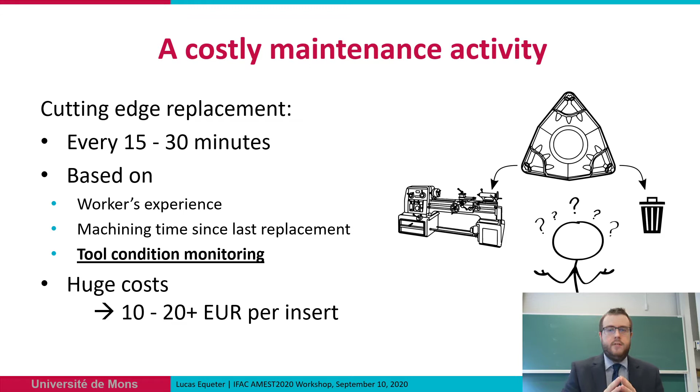In industrial practice, the replacement is based on several possible factors: the worker's experience based on machining noise or personal assessment of the machined surface quality, the machining time since last replacement, and finally the more modern option, tool condition monitoring. Each of these options corresponds to a type of maintenance. Obviously, the first case is highly dependent on subjectivity, and it is unclear how one should qualify this option.

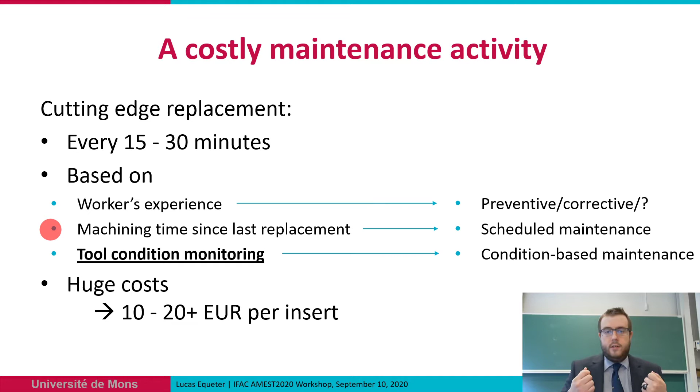Then we have scheduled maintenance or condition-based maintenance. That is the current industrial practice, so let's have a look at the standard guidelines.

In turning, for example, ISO 3685 defines conditions for tool life testing. These conditions are based on the flank wear of the tool. When the average measurement of the flank wear in zone B, denoted VB index B, reaches 0.3 millimeters, the tool is considered to have reached its end of life. The second condition is met when the maximum measurement of the flank wear reaches 0.6 millimeters, and the end of life is decided upon whichever comes first.

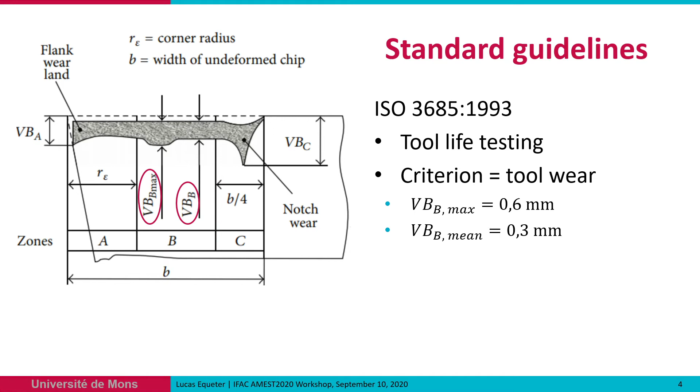Now, in comparison with industrial practice, it may be linked to two of the options. The scheduled maintenance option is directly derived from the standardized option. On the other hand, in the framework of condition monitoring, one may try to identify, through the use of sensors, the moment when this criterion is met.

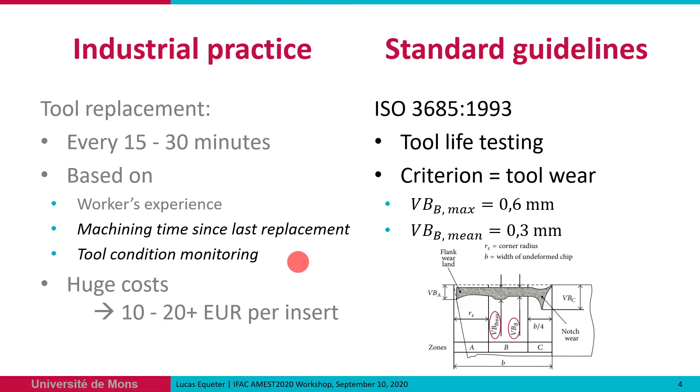However, the limit of 0.3 millimeters is arbitrary and does not correspond to any industrial optimum, hence the search for a remaining useful life estimate which focuses on an industrial optimum.

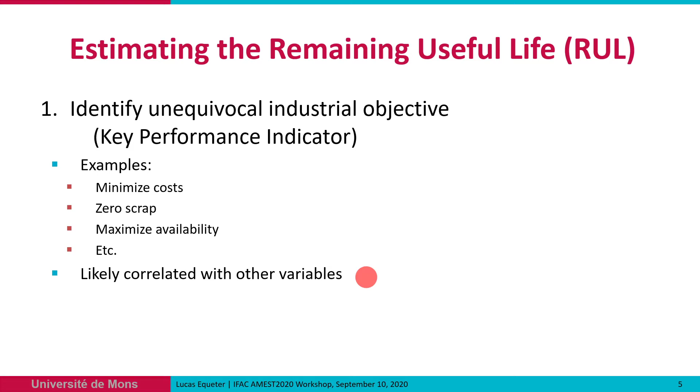With this respect, one should establish clear industrial objectives, among which the foremost criterion is likely cost-related, but it is likely correlated with other, more physical criteria, such as tool wear. Once the KPIs are identified, then statistical methods allow estimation of a RUL with respect to the industrial objectives.

To sum up, what do we know so far? Well, we have our process data: the duration of machining cycles, the number of machined workpieces, the costs, etc. We also know what we would like to optimize, be it the cost or the scrap rate, for example. In turn, we would like to be able to use a maintenance policy that best satisfies these demands.

So, for cutting tools, what do we need to invent to get from one end to the other? First off, let's acknowledge our maintenance optimization criteria. What do I want to optimize? Most likely the answer will be the cost or the profits.

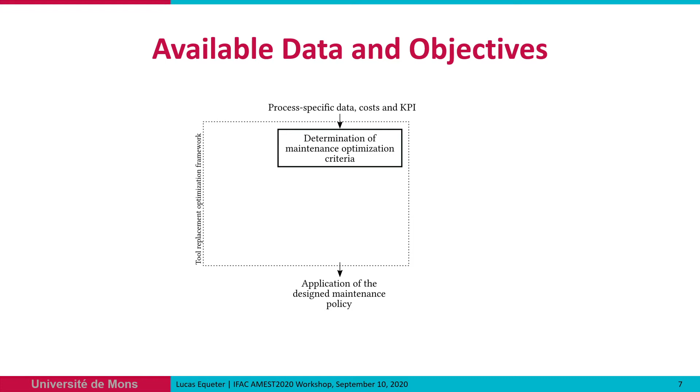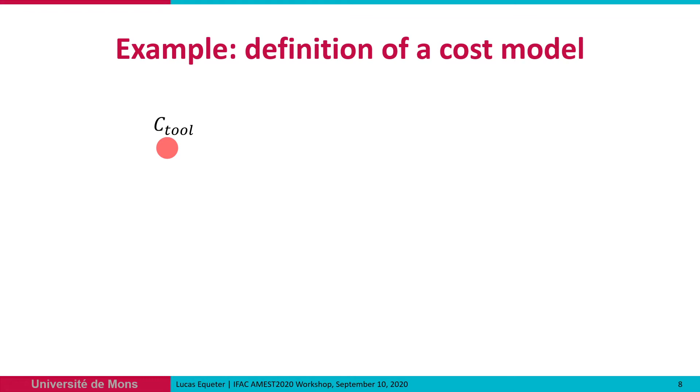It may also be the quality in a zero scrap policy, but let's go for the cost for a moment, for the sake of the example. It may be broken down into some of its components: the new tool cost, including handling and assembly, the worn tool handling and recycling cost, the unavailability of the machine, and the scraps.

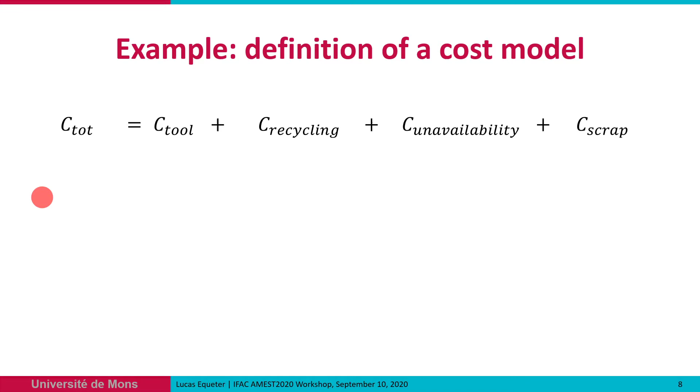All these correspond to the total of costs over the lifetime of a single cutting insert. Obviously, one would compute the asymptotic average cost over time or over the whole life cycles.

We can obviously refine a bit depending on whether the tool failed and induced scrap or whether it was replaced preventively. The computation of costs therefore depends on what scrap is, what tolerances are necessary, and how they are checked.

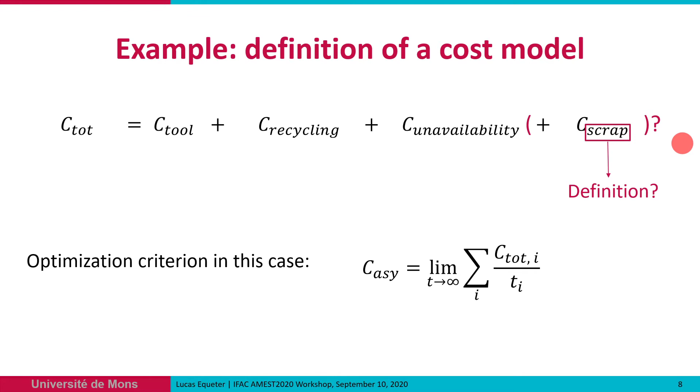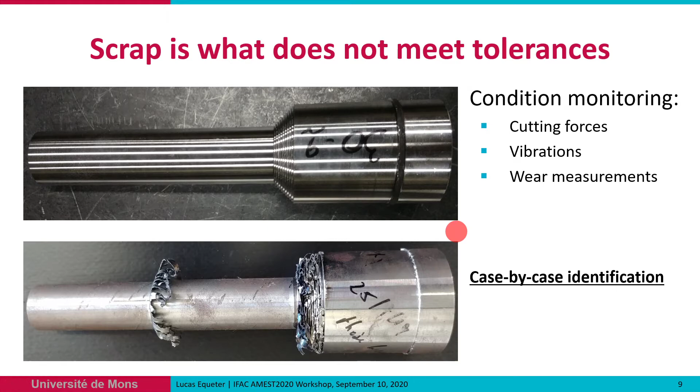And this brings us to the question of condition monitoring. Indeed, depending on the tolerances of the machined surface, the condition monitoring variables may be chosen accordingly. Usual suspects are the cutting forces, vibratory measurements, offline flank wear measurements, etc.

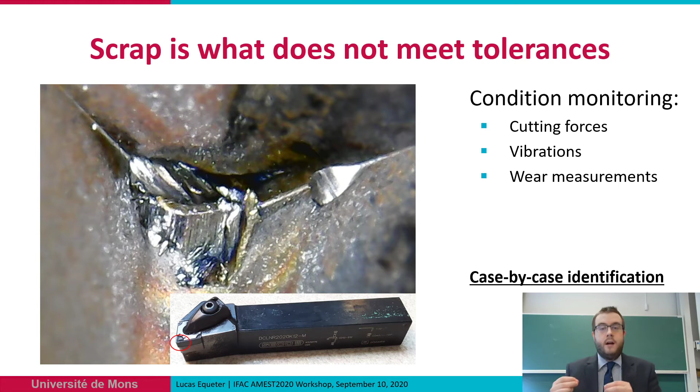The real complexity of this part is strictly to identify the variables that indicate the imminence of a failure. This is strictly case-by-case research with help of the literature. The most probable way to go is the identification of the tool failure mode, which induces scrap, and deduce from it the condition monitoring variables that would best be correlated.

Short point before continuing: this entire step may be bypassed if the condition monitoring variables are well known, or if the tool failure probability distribution parameters are so well known that they make condition monitoring a waste of time and money. I personally doubt it, but it may happen. What's left?

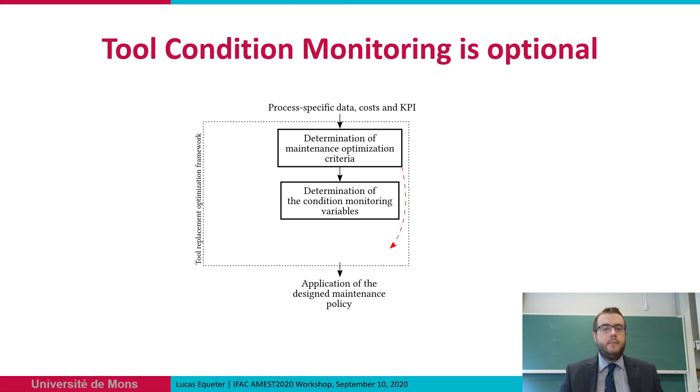Writing down the actual replacement policy. Now come the subtleties. Machining is not a continuous operation, and it cannot be stopped at any time for a maintenance action. Unless a catastrophic failure occurs, one waits for the end of a cycle before replacing the tool.

This is why the computation of the remaining useful life by itself is not sufficient. It should, on the contrary, be compared with the duration of the next cycle, which is known thanks to the G-code. In terms of probability, we are trying to compute the probability of no failure occurring until time t plus cycle duration, knowing the current state of the tool at time t. But let's stick with the RUL estimate for now.

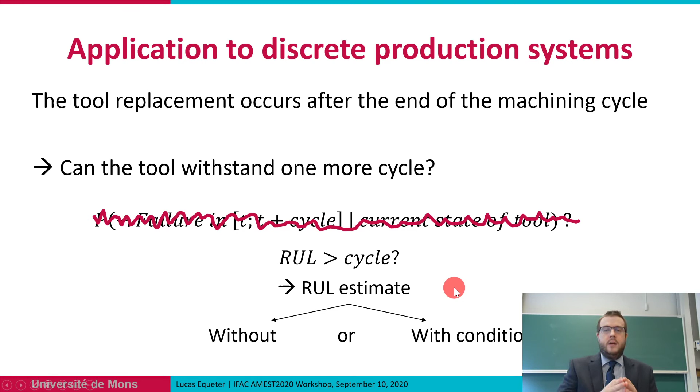We'll break down the case into two possibilities depending on bypassing the previous step: without condition monitoring or with condition monitoring.

Without condition monitoring, the strategy will be to rely on statistical distributions of the failure time and to best identify their parameters. The failure time is strictly defined as the time at which the tool is no longer able to produce within tolerances. It is more convenient to use the actual duration of contact between the tool and the material rather than a number of cycles that may vary from one workpiece to another.

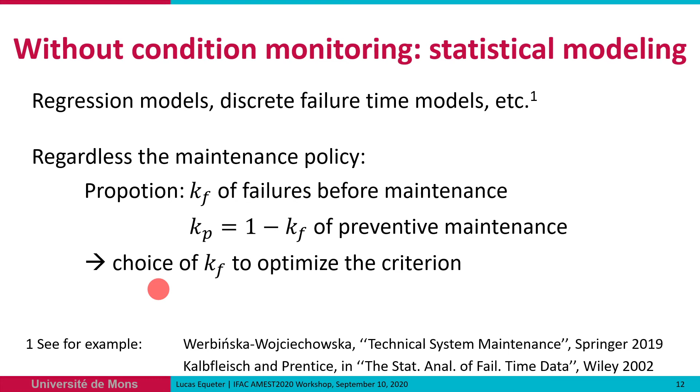Once one determines the reliability distributions, failure will still occur for a fraction kf of the tools, while preventive maintenance will replace tools that did not fail yet for the rest of the cases, kp. In this case, the remaining variable to choose is kf, which must be optimized with respect to cost. Reducing kf to 0 would lead to infinite cost, but scrap costs make a failure more costly than preventive maintenance, so an optimum may be found.

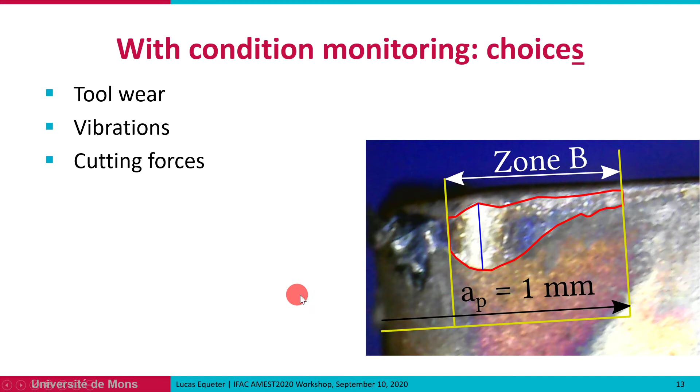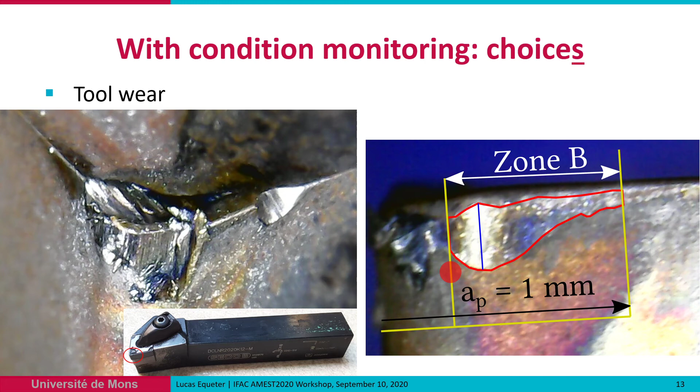What if we're using condition monitoring then? It's more complex, but possibly more rewarding. Tool wear may be considered the best option for describing the evolution of tool life, but it's necessarily an offline procedure that is time-consuming and necessitates image post-processing. Fortunately, a large range of wear estimation methods were developed in order to assess the tool state at a given time using other condition monitoring variables' values.

Condition-based maintenance may be used by factoring in the value measured in condition monitoring variables. As an example, one would trigger the replacement of the tool once the cutting forces reach a certain value.

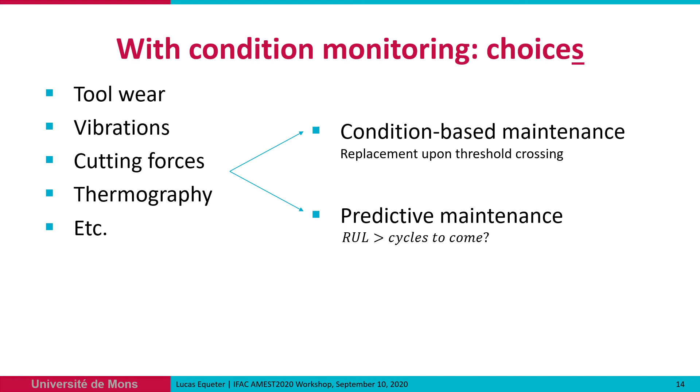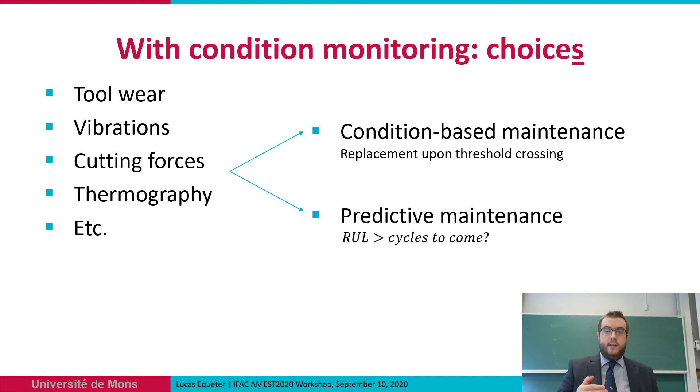Final option, my favorite: predictive maintenance. If, in addition to all of the above, one can estimate the influence that the planned following machining cycle will have on the tool, then we can estimate whether the next cycle will bring the tool to fail, and if so, we can replace it beforehand. Stochastic models or survival analysis, for example, may be used for this.

In each case, with and without condition monitoring, we now know when to replace a tool. So let's have a look at the industrial implementation of this methodology.

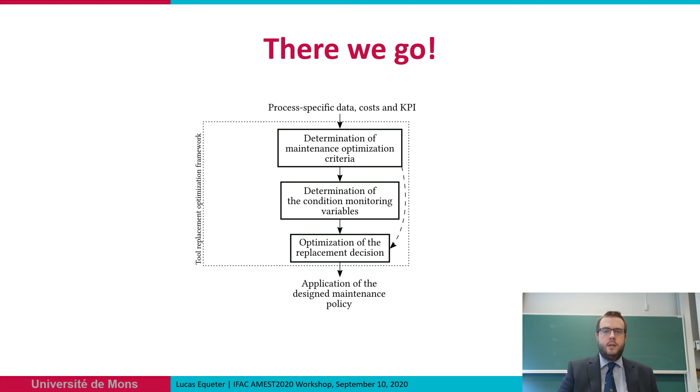Let's imagine I'm trying to get from the subjective calls of the worker to using this methodology. First, collect data: minimum, the replacement time and the cause of replacement. Second, explore potential gains without condition monitoring through simple statistical analysis. Third, if that works, see what investment would be necessary to do condition monitoring on the variables most related to the failure modes.

Why am I stressing this? Because Industry 4.0 will bring big data to our computers, but correlation is not causality, and the actual physical relationship between variables must be privileged.

Fourth and foremost, once the maintenance policy is defined, challenge it on the basis of experience and loop the method as much as necessary.

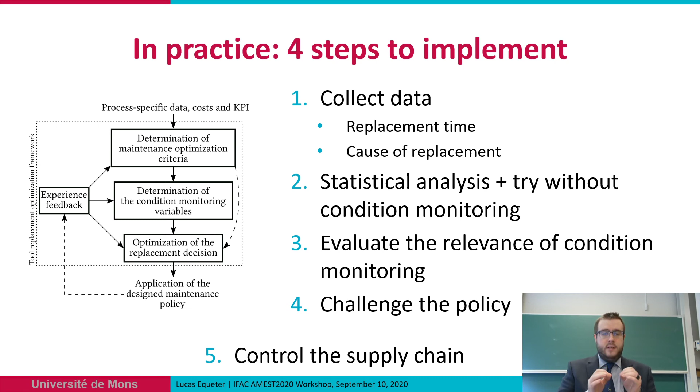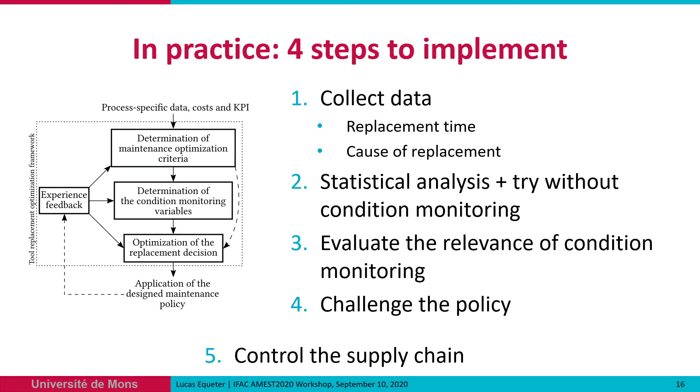A lot of variables are involved. The variability of cutting tools and of materials will influence a great deal of these policies' results. The constancy of the supply chain for both materials and tools must be assessed. The definition of tolerances should be kept to the functional—no need to over-specify. They also must be unequivocal in order to make the definition of acceptable workpieces identical and common to maintenance and production personnel alike. Finally, other tools such as total productive maintenance should not be overlooked. They may play an important role in improving quality and reducing cost.

What I presented today is not per se a new approach in maintenance. On the contrary, it is common practice for most maintenance policies. Yet cutting tools are late on this one, but they are also costly. This is why the first objective must be to clearly determine with all involved parties the optimization objectives, usually cost-related, and what workpiece is acceptable or unacceptable.

Then, the tool replacement must occur close to, but before, scrap is produced. At the dawn of Industry 4.0, we must keep the physical sense of the data analysis.